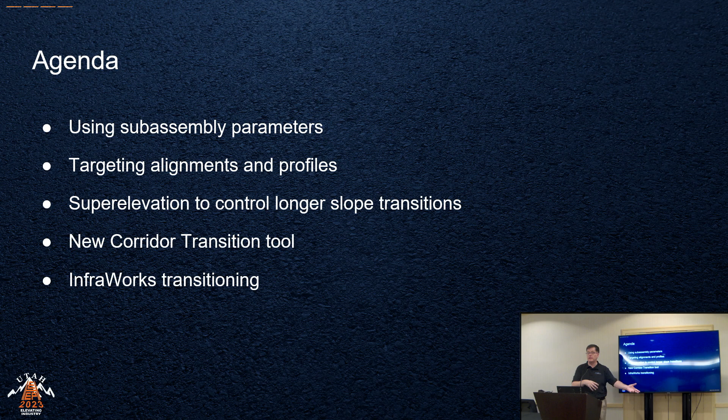So if you've got transitions that you know are coming, kind of the broad strokes of transitions, and you're using InfraWorks, do them there and then move that into Civil 3D for the final, more granular detail of your project.

So a lot of the concept that I'm going to talk about here today is the right triangle. And generally, up to a point, I'm going to be talking about having to compute two legs of this. Either I give you the width and the elevation, that'll give me the slope, or I give the slope and the distance, and that'll give me the elevation or the depth. You've basically got to provide two legs of this triangle, and there's some computations that are going to go along with that if that is indeed what you're needing.

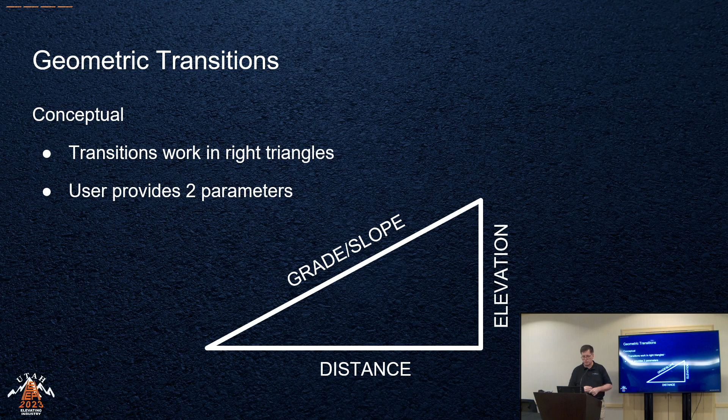Now, this is going to change when I talk about that new tool. But I'll talk about that when I get there. But this does get easier than what it is for the most part across the course of project work.

So let's first look at the subassembly parameters in the corridor. I've got a screenshot here of an orbited corridor. We spend a lot of time looking at corridors straight down, and you get frequency lines through there. The frequency lines are literally your assembly being applied over and over through the corridor. The assembly is also providing point codes so that you're getting what we call feature lines along the corridor, like crown point to crown point, and edge of traveled way to edge of traveled way.

These lines are absolutely straight. So there's no curve to them. You could probably compute something in there, but generally the corridors exist to be straight between known locations. Everything in between is just iterative or implied information. So again, great for understanding the construction of a corridor. However, for transition, this isn't always the best way to create a transition.

If I was to expand a lane, let's say going from a 12-foot wide lane to a 20-foot lane in an area, I could do that very quickly and make the transition area very close together so it's a very hard, sharp edge. If you need to make it a long, sloping transition over a long area, this is where this one kind of falls down, because it is going point to point directly. I will show that in a bit here as well.

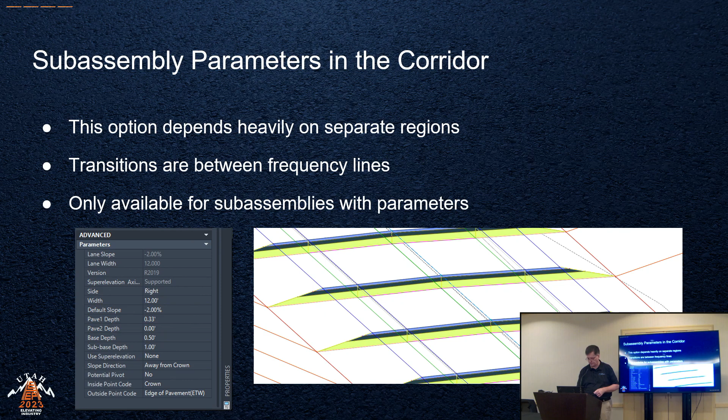Also, you only have available the subassemblies with the parameters that you have. Most assemblies are going to have what you need, but you do have to have that planned out for what you're looking for. So like I said, I'm only going to spend a little time on that. I will show some of that in demonstration. However, I want to talk more about the big tool, and that is alignment and profile targeting.

Alignment and profile targeting generally are going to control either the horizontal, that width of the right triangle, or the elevation, the vertical targets. Horizontal targets can be things like alignments, which are 100% horizontal location. There's no elevation component to them. If you want an elevation component to an alignment, that's a profile. So that's where that division line is.

You could also use feature lines or even polylines to target the width that you're needing for your corridor. For the vertical targets, you have profiles. Feature lines actually appear here as well because they are a three-dimensional line. So you could lay it out horizontally, but then go in and edit it so it has elevation. So it can control both aspects.

However, again, just like that right triangle, you are computing where that elevation is. So that is really on you or the designer to figure out where that location is. And by the way, keep in mind that elevations are affecting the slope. So if you are trying to define a slope out there, you're really working on the elevations of that right triangle to make sure it's in the same spot.

For me, that's a lot of computation, especially in transitions, because I need to hit certain points along a transition and make sure that my profile or whatever it is that I'm targeting is doing that work for me. This is great for longer and more accurate transitions because you can lay that out however you need it to go. Every nook and cranny can be modeled with alignments or profiles or what have you.

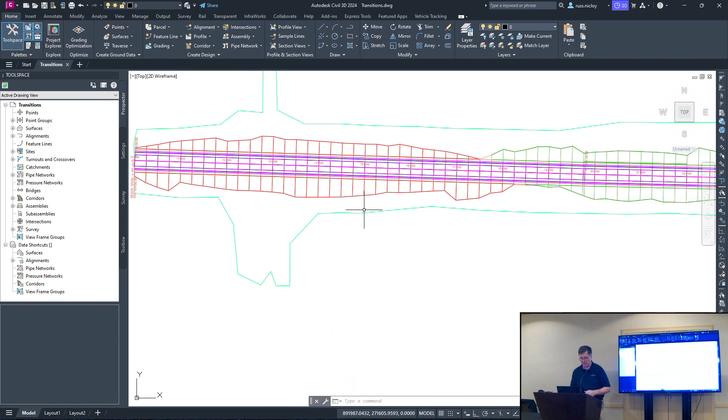Also, and I've talked about this, controlling the slope factors, knowing the profile elevation and width. So you're having to compute those two legs of the right triangle there. With that being said, let me jump into Civil 3D here. And first of all, let me orbit this again, just to make sure that we're all on the same page and understanding what the corridor is looking like in general.

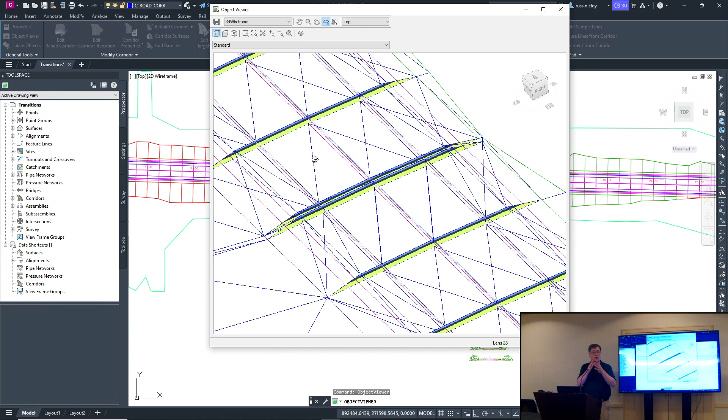Notice that the lines that are across the corridor here are the frequency lines, and they end up being basically a top-down view of your assembly being applied at the frequency that you are requesting. And you can make that frequency whatever you need it to be, very short together, or if long stretches of highway, maybe 100 feet, you can do whichever one is appropriate for you there.

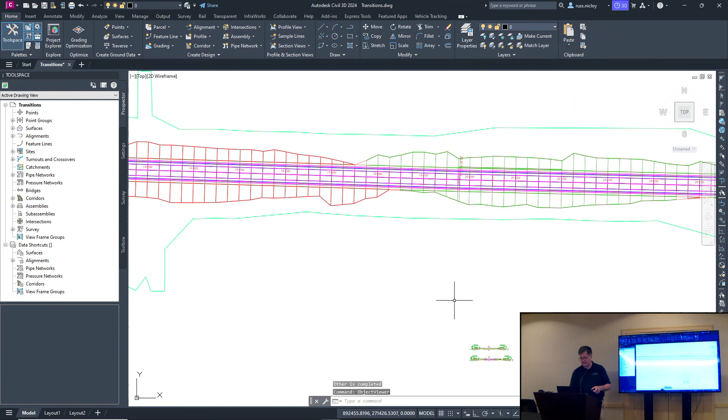But notice that I am getting lines that are going along here. These are the feature lines I talked about. The crown points are going to the crown points, the edge of traveled way through there as well. Now, I am going to show you the assembly that I have in that corridor is this top one. And currently on this right-hand side is a 12-foot wide lane. I've told the parameters, you're 12 foot. If it doesn't have targets, it will default to 12 foot. And I have no targets, so it's 12 foot along my entire corridor here.

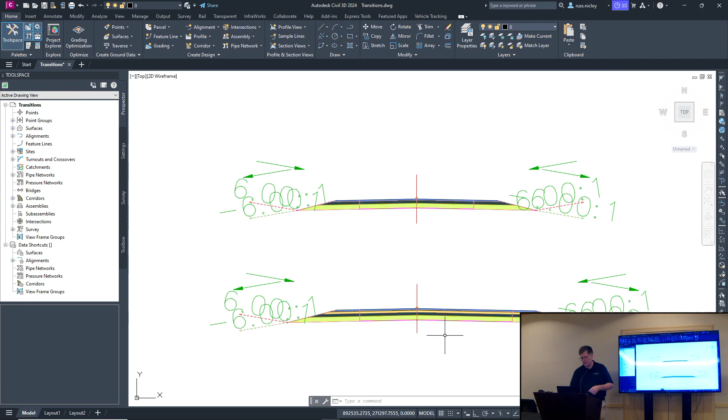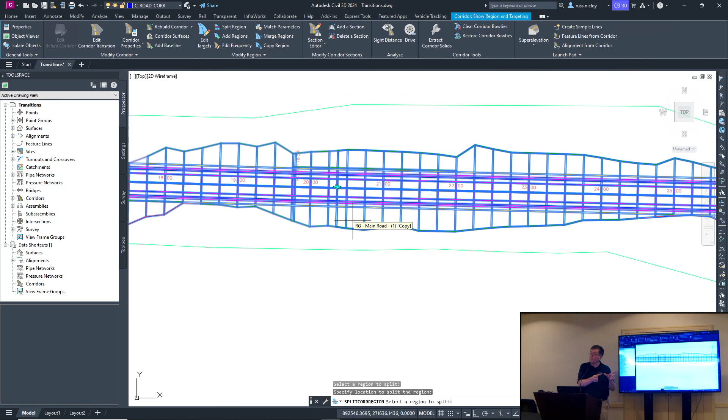Right below that is one that I'm going to add in, which is a 20-foot wide lane here. And let me drop that in so you can see what that looks like. I'm going to grab that corridor. I'm going to split this region. And now I'm going to click a point here that'll add a frequency in, and you can see some grip points because it's actually breaking that into two little areas that I can control separately from each other. I'll come over here and add another one there.

And now, I'll go into the corridor properties, and in that middle region, I've highlighted it here, you can see it's highlighting on my screen, I'm going to add in that second assembly that has the 20-foot lane to the right. And I'll rebuild that. And then in here, you can see the width of those rows. Now, if you're not used to seeing this, let me call out where the lane is. The lane is right here in the 12-foot and right here in the 20-foot.

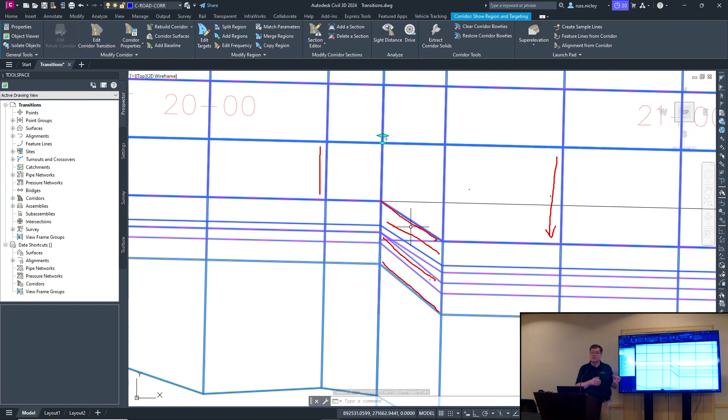Okay. But notice, more importantly, these lines here, where the edge of traveled way and the shoulder, because the shoulder has to transition along with the lane, it's all attached, those are going directly over there. Like I said, this is great if you need a very sharp transition. You just make that space right there, well, I've got maybe 10 feet, make that 0.01 feet, so it's almost a direct wall over there.

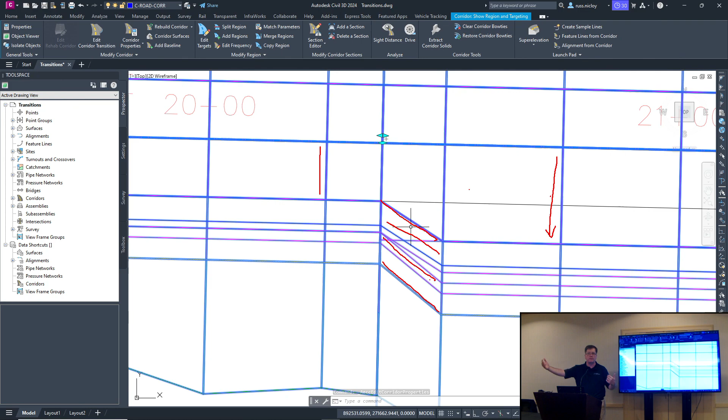Great for a hard cut. However, many of the transitions you're going to do are much smoother than that. They're going to be over 100 or 150, 200 feet. Those are not going to be as pretty when you do something like this, because you would have to get rid of a whole bunch of frequencies through here to accomplish that.

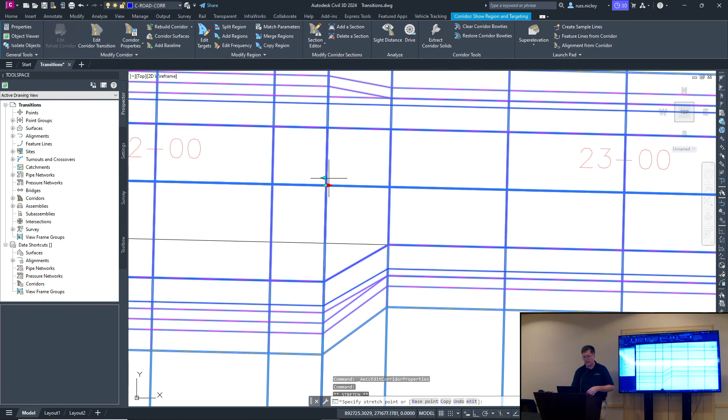In fact, I have seen this, and I don't recommend it. Before I do this, I'm not recommending this as a way to do it, but I want to show you the consequences of this action. I can grab these regions and separate them by quite a distance, but there you can see the problem. Okay. Now, this isn't as big of a problem as it may look at first. It's a huge problem, but it's not as big as it may look.

The feature lines cutting across there have stopped. They don't jump that gap. However, when we build a surface from this, the surface will jump across there. So it is a viable option. But again, I don't recommend it because you are trusting, and I'm not a trusting person when it comes to something like this. You're trusting that the surface is going to do everything that you intend across there.

By the way, it also prevents you from using a boundary around your corridor, or at least a boundary that you would probably want to use through there, or an automated one. So it's not the best option for this. But understand that people have done it, they've gotten away with it, especially in the early days of Civil 3D.

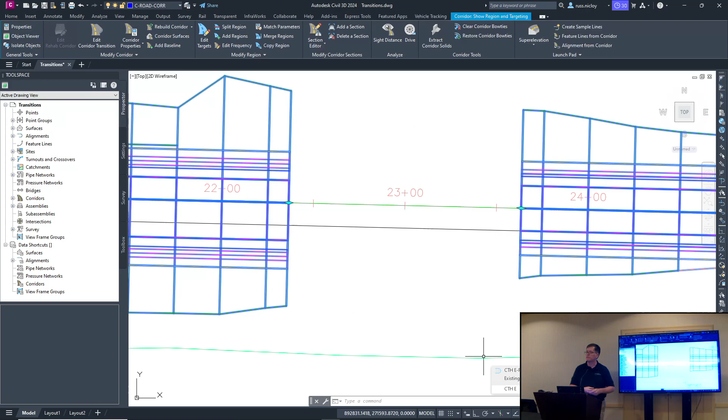However, there is a much better tool, and that is the targeting of the alignments and profiles. I'm actually going to go into my section editor here so you can watch this area as I progress through with it. And just so everyone is familiar with the view that I have, if you're not using Civil 3D or if you're new to it, I'm using the section editor so I can see at this station right here where I've aligned, that's what this cross section here is. That's a live view of the corridor as I'm using it here. So we'll be able to see some of the changes that I make live and in real time.

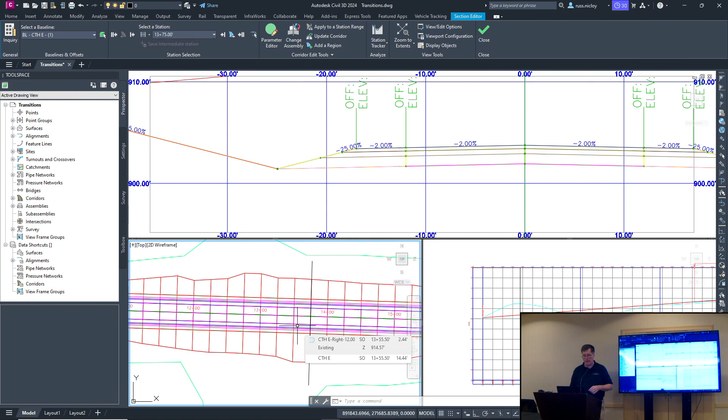But what I'm going to do in this area here is I'm going to make an offset alignment for my horizontal target. Now you can draw this in however you want. I'm going to use the automated tools to do this, okay? It's just one of the options at your disposal. You don't have to do this. You can draw in whatever crazy shape you're having to go through manually. I'm going to go in and say, well, I want this alignment right here, and I'm going to create an offset alignment. Offset alignments always stay parallel to their parent.

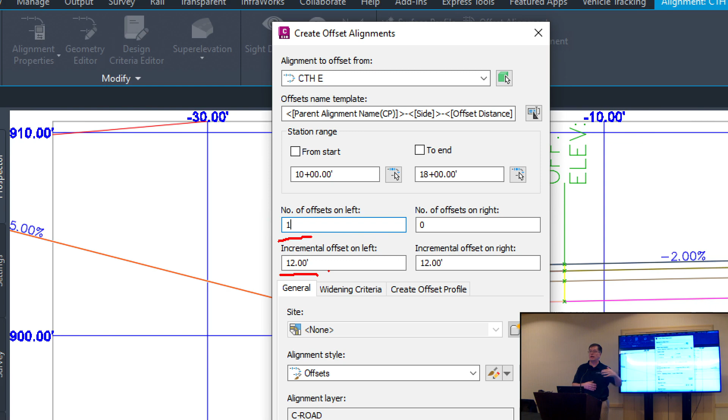I'm going to say I only want it for a little bit here. And I'm going to turn off the right-hand side. I'm only going to make one on the left-hand side. And the incremental offset here, let me zoom in on that so you can see clearly. I'm doing one to the left, and I'm going to do a 12-foot offset because my original lane is 12 feet. I want a nice tie-in here. Then I'm going to widen that out so that I can get to a nice turn lane or bus inlet or whatever it might be that you're designing there. So I'm going to go with the 12-foot.

I'm also going to turn on the Create Offset Profile because, again, you can create your own profile and make it however you need it to be. In my world, that's a lot of computation in a lot of cases, so I don't want to have to do the math if this is going to do this automatically for me. So I'm going to let the automated tools work for me, but just understand you don't have to.

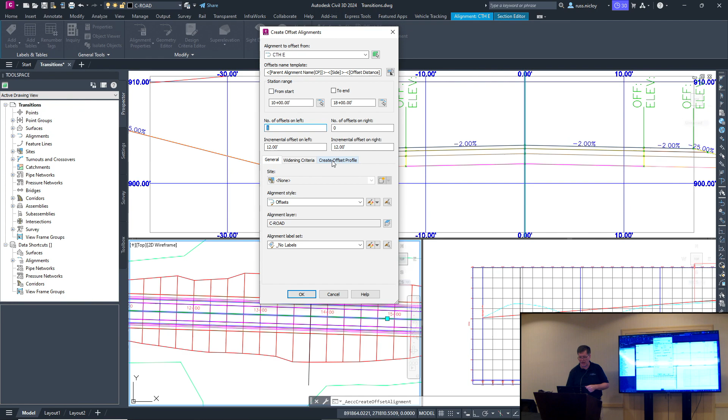The thing I really love about this is in the Create Offset Profile, you identify what you want that slope to be. So remember that right-hand triangle. I'm giving it the width and now the slope of what I want over that distance, and it's going to give us the elevation on that other leg. So with that, I'm going to say okay to that. That puts the alignment out there.

And I should have shown this beforehand, but the red profile here is the design profile. The green one is the offset profile. So over 12 foot, it has created a profile that is that 2% drop over the 12-foot distance.

Again, you could build that yourself, but you'd have to figure that all out. And I've met people that could do that off the top of their head. I'm just not one of those people. So I'd like to let this tool do it for me.

Now I'm going to zoom back on that just a little bit, because now what I'm going to do is widen this out. And you'll see that profile will adjust to the width that I'm giving it. I'm going to go to this alignment here, and I'm going to create a widening in it. I'm going to say from about here to about here. Not a very wide one, but I'm going to widen it to 25 feet.

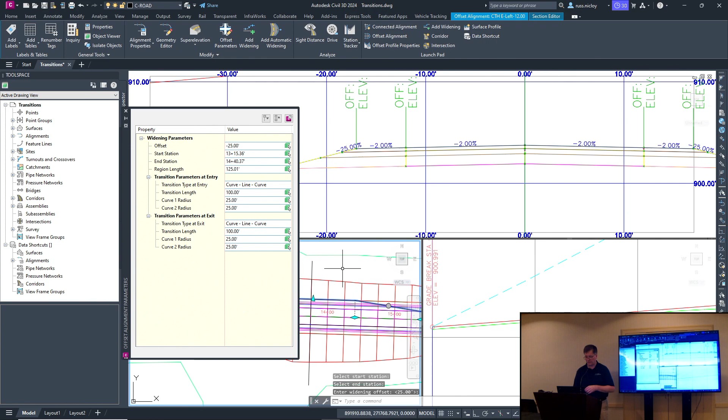And there you can see that alignment is built through there. It is building a transition in there which you can adjust. You can grab those grips. You can go into the dialog box and type in a very precise number of where you want the transition to start and end. So you've got quite a bit of control over it. But it is going out to 25 feet there.

Now with that, that's at about 1,300. Let me come over here and you can see at 12 feet at 2%, this is where the profile is, and then it starts to transition down to 25 feet at 2%. So it's doing all of that math for me and putting that profile in where I need it to be.

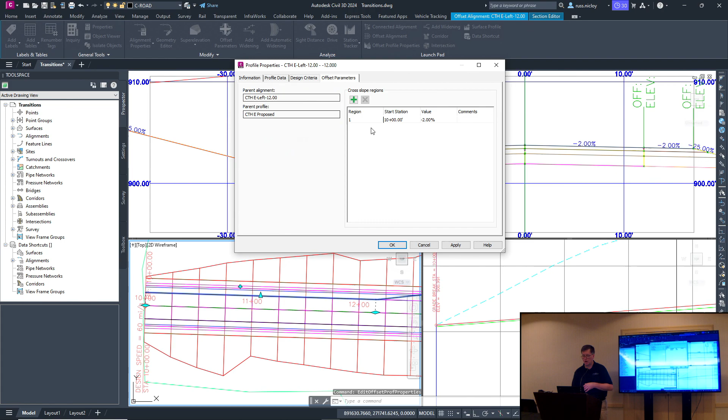Now, that's one part. I am going to build another one in here, and that is I'm going to go into that same offset alignment, but in this case, I'm going to go into the offset profile properties where we are controlling where that slope is. So if you decide, oh yeah, negative 2%, that's not what I wanted, I wanted negative 3, you can fix that here. It's editable.

However, what I'm going to do is I'm going to add in a couple here. I'm going to push a part of my roadway down so I can get into drainage or do whatever I need to hit. Maybe I need to hit a specific elevation somewhere. I'm going to click and add in a station. I'm going to add these very, very early on, 10+25. And at 10+25, it's -2.

So I want it to be -2 for a little bit here, and then I'm going to start transitioning into something else. I'll go to 11+00. And at 11+00, I want that to be a -5%. I'll say I want that to go to 11+75, and that's also going to be -5. And then at 12+75, so a nice 100-foot distance there, I'm going to send that back to -2.

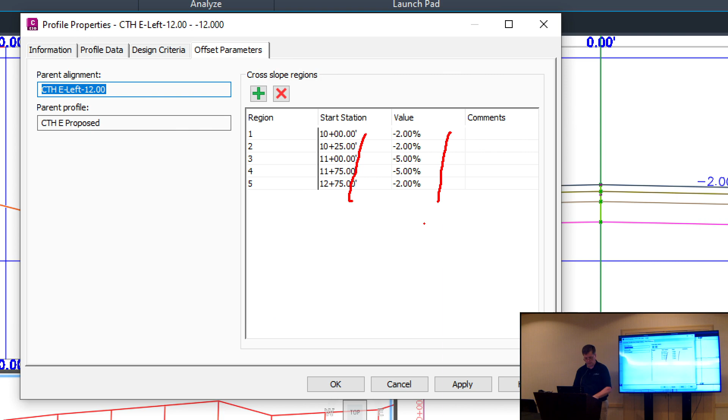Now, I chose those stations because they do overlap some things, but you can see again, just like we had earlier, you can see the stations and the slopes at each of those stations, and it's all editable. So if I made a mistake and it wasn't far enough or didn't give enough space, I could make those adjustments here again. I'll say okay to that.

And now, notice that the corridor really hasn't responded to it. And if you're not familiar with Civil 3D, the lane here is not targeting that alignment yet, so it's not widening yet. Also in our cross-section, we're not getting the slope change yet. And that's because I haven't told the corridor to do that. Let me jump into the corridor properties.

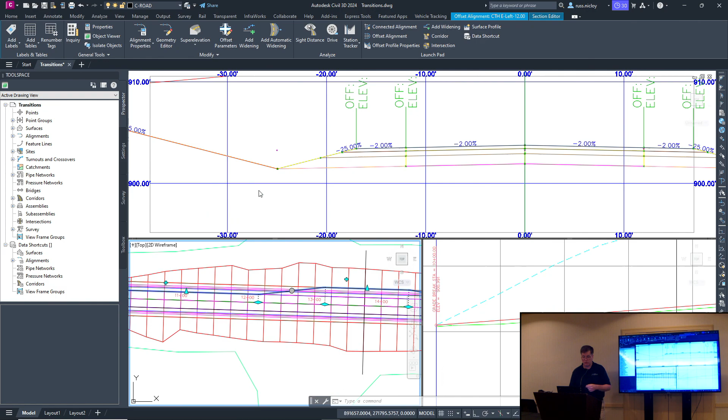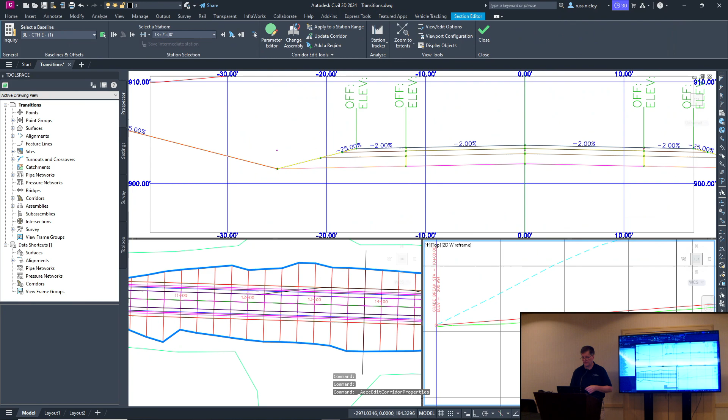And in here, I need to tell it that it's targeted to those things. So I'm going to go to the left-hand side. I have an outside elevation target that I'm going to target to my profile. And I have a width target that I'm going to target to that offset alignment. And once I have those set, I rebuild the corridor there.

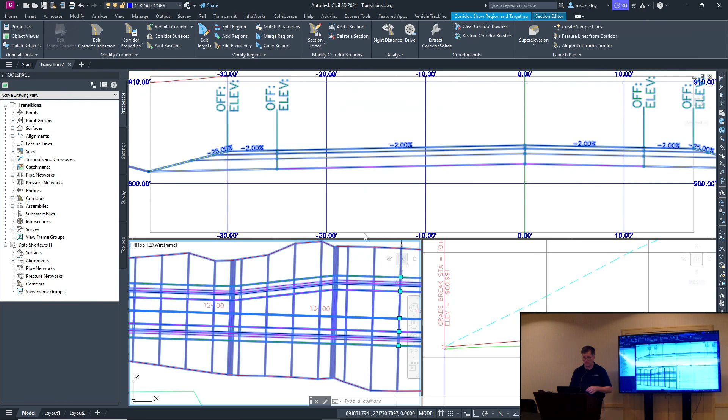And there you can see the lane is now reacting to that. It matches up nicely with that alignment that's in there. Also, if I start to adjust down my alignment there, let me get in so you can see the change. There you can see the slope of that lane is changing. Also, depending on where I am, right here I'm at 12 feet, but I can widen out to 25 feet in width, but that slope is changing across the course there.

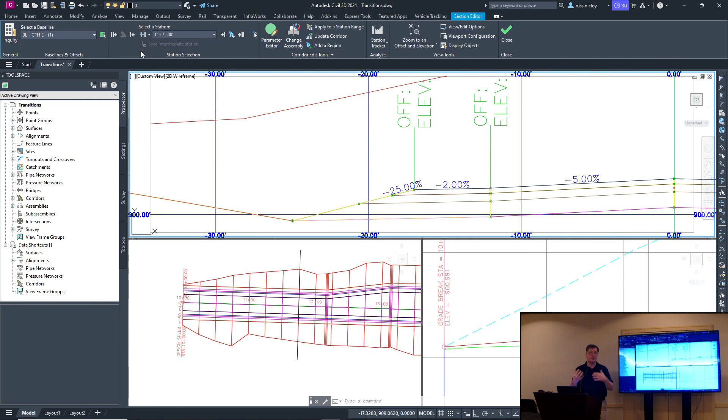So I've done a fairly complex bit of targeting in one area there, trying to get a couple different things going on with just alignments and profiles. Like I said, I believe about 90% of your work can be done with just those two tools alone, depending on how you station them and how you put them together. A little bit more computation on your end, perhaps, but the automated tools take care of quite a bit of that for you.

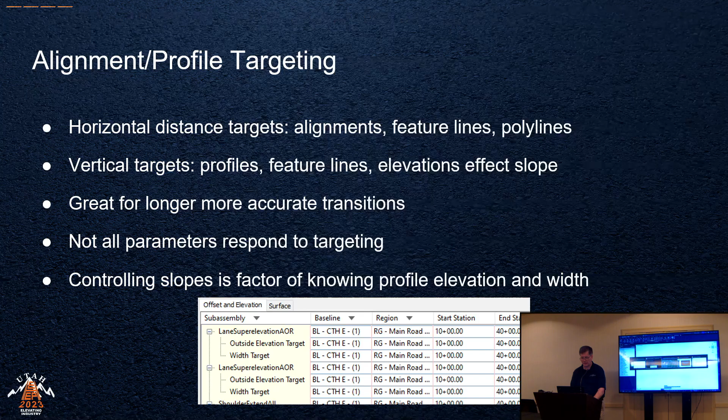So let me jump back in here so I can talk about that a little bit clever tool, the super elevation for transition control. And let me state again that this is not talking about super elevation directly. This is using the super elevation tool in a way that was not really planned on, or at least I don't believe was planned on.

I've seen it used here or there. Again, I don't know that I recommend it. There are some things about it that you need to be aware of. But I have seen it used in niche areas that I think you need to know about it at least. So for this, one of the key parts of this is that in the super elevation table, you have 8 columns of information. Now, they're all named for the critical stations of a super elevation, but that doesn't matter.

Those names are only there for targeting purposes and so that you understand where you're at and what you're getting. Also to communicate to others where you are and what you're doing. So those columns can be whatever you need them to be. Like I said, I did see this used for somebody who was building a golf course. And they used it to build bunkers and little hills throughout the course of the hill. Never thought I'd see that out of a corridor, but it worked and they used it.

So now, like I said, there's some huge issues here. First of all, what if you don't have any curves in your project? Now, this is actually not a problem. It had been a problem back in the day, but Autodesk has addressed that. There's a way that you can put in what's called a user-defined curve. So that problem's really off the list.

Now, something that's probably a little more of a problem is what if you have super elevation in your design already? At least some of those 8 columns are taken up. So you've got to kind of plan that out if you are going to use this. Like I said, these tools really are there for very specific kinds of work. And on transportation, they might not do everything that you want to do.

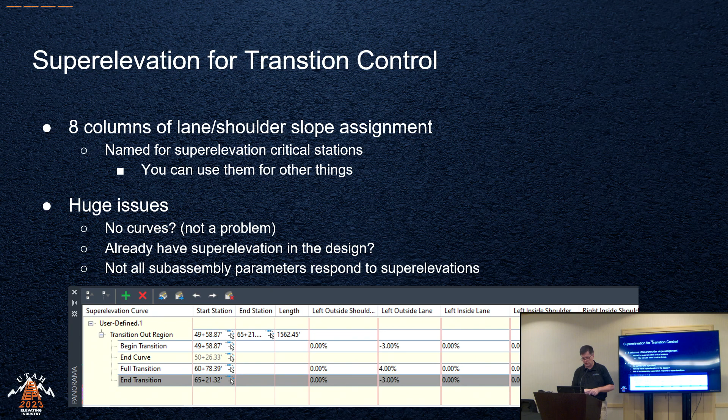So let me show you what that looks like, just so that you get a sense of what's available. This roadway does not have any super elevation. In fact, let me go into the tabular editor there and show you a complete blank super elevation table. There's nothing here. Now, I need to call that out because I'm about to put something in here and use that for my own purposes.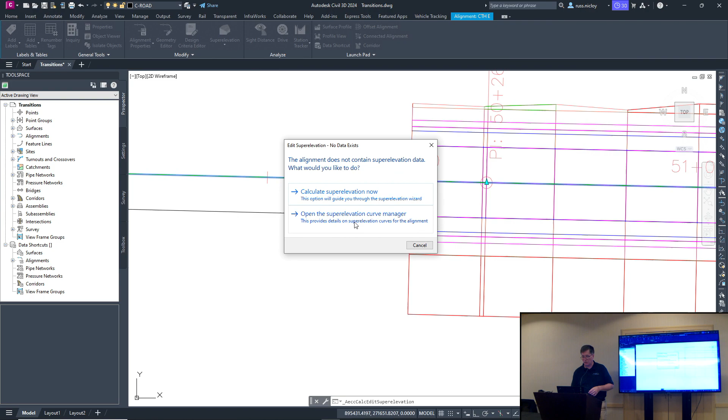What I'm going to do is go in and calculate the super elevation. There is a wizard, and I highly recommend that for super elevations anyway. It's a great tool to automate that process. You answer questions, it does the geometry for you. However, for what I'm doing, I'm, again, being a little more clever here. I'm going to go down to the Open Curve Manager, and in there is the Create User Defined Curve. That's Autodesk's kind of go-around when you don't have a curve. So I'm going to choose that tool right there, and I need to select the alignment.

And with that, now I'll go into that table again, and now you can see there is a user-defined column in there. It's basically a placeholder where you can add information into. I'm going to go up and hit the plus sign. You can add superelevation stations at any point. So if you're doing a legitimate superelevation, you could use that plus sign.

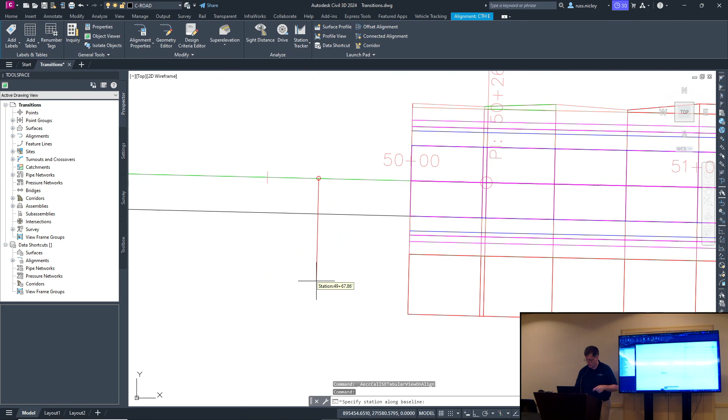And I moved just as I clicked it. There we are. Actually, I'm going to start right at the very beginning of my alignment there. And at that station, now I don't play pool, but if I did, I'd call my shots. I'm going to add this into the left-hand lane. I'm going to intentionally use the right inside lane column, just so no smoke, no mirrors, so that you can see, to prove a point that you don't need those names up at the top to be anything other than how you are assigning.

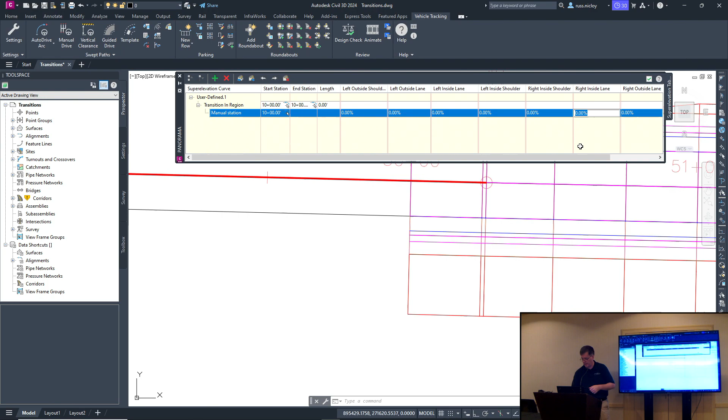So I'm going to go to the right inside lane. I'll say -2% there. Then I'm going to add in a plus sign, and then I want -2% to come up through the station about here. And at that station in the right inside lane, now notice it says -1.2. Where's it coming up with that?

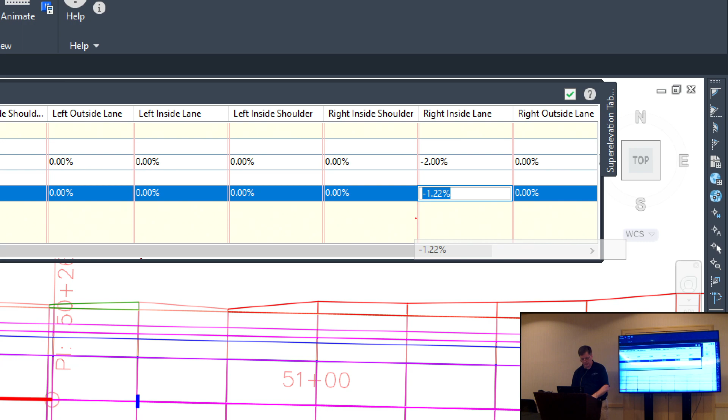Well, the whole thing here is that the superelevation table thinks of 0 as its start point, and when I gave it -2 at the beginning, all the way at the end of the alignment, it's still 0. So it's transitioning over a couple thousand feet down to that. So by the time I got to about 51+00, it's at -1.2%. So I just need to go in and make sure that that is correct at -2.

Last time it's normal. I'm going to add in another one here. I'm going to say that's 51+25. At that station, I want that to be -5%. And I'm going to just add one more in here at 53+00, and I'll say that's -2%. And again, I would add another station at the very, very end to be -2. That way I have a normal -2 all the way through the rest of my design.

Notice all of these columns are editable. If they're kind of this goldish color, then it's a locked field, but generally slopes and lengths and end stations are editable. Also, the names are editable here. So in this case, these are not critical stations. I'm going to add in, this is my alignment start.

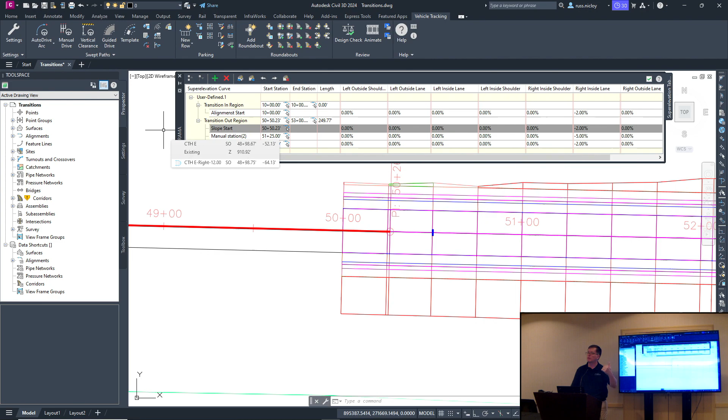I like to label these things, first of all, because my memory is terrible, but secondly, because somebody else might take this project over from me and they won't understand what's going on here. Hey, there's no superelevation on this, what's going on? They can read these out and say slope start. So those names don't have to be anything specific, but they can be that reminder for you to remember what is what throughout the course. I'm not going to fill it all in here, but that is now assigned to this alignment.

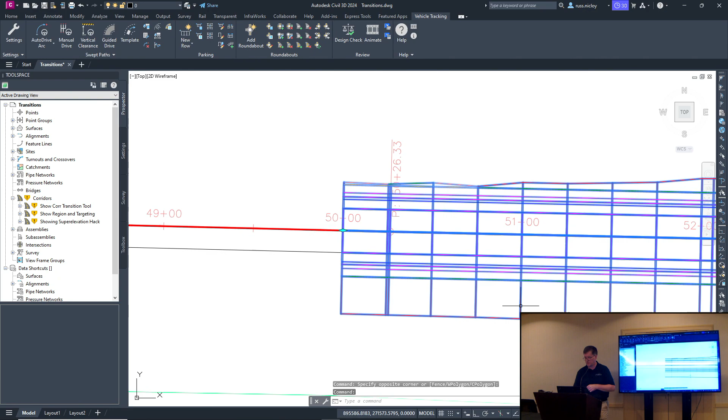Now, the corridors all, as I always call it, got angry. They're like, hey, something's changed. I don't know what. You need to rebuild me. I'm not going to rebuild it quite yet, though. I'm going to go into station 51+00 here and go to my section editor, again on the left-hand lane.

What I need to do here to make that slope appear on the left-hand lane is tell the assembly, or the subassembly part, what it's targeted to. The lane that I have here, when I placed it by default, had use superelevation set to none, which means it's literally 0 or -2 if I've given it that. It's not going to be responding to my superelevation table at all. Doesn't matter what I put in or where I put it in.

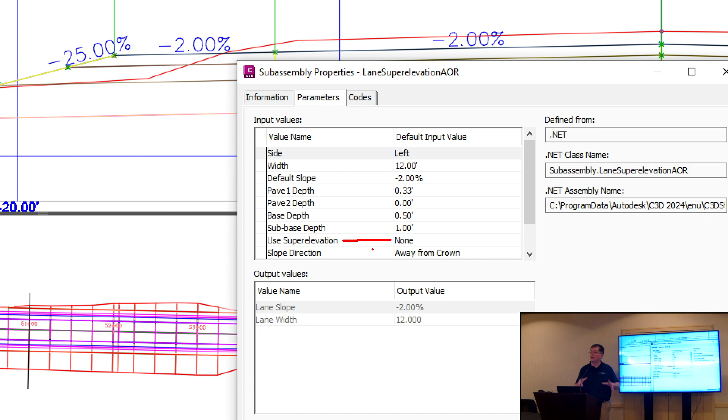I'm just going to go in and tell that particular station that it's the right lane inside. Remember, I called that one earlier. Right lane inside. I'll say okay. And now I'm going to rebuild all the corridors just so that they all are comfortable. And there you can see we're at 4% at this particular station. I can advance. I'm at full super, 5% there. And now I go back to 2%. So you can see it's now responding to that.

The right-hand lane isn't responding at all. I haven't turned that on at all. I could set it to the same right lane inside, or I could set it to something else if I've decided to use that at my disposal. Like I said, it's a little bit clever, something that you can get around issues with.

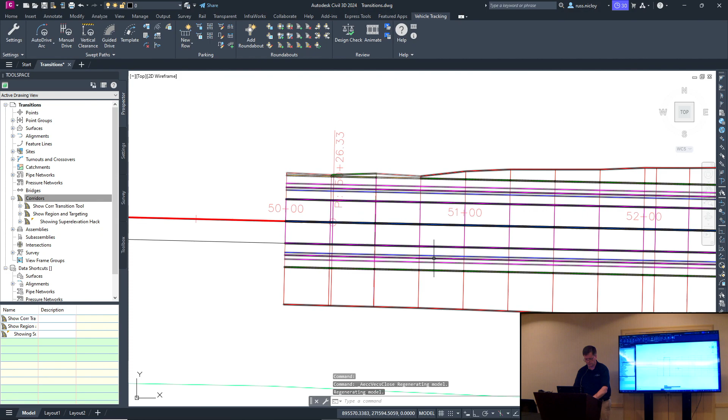So just something to know exists out there. Let me now talk about the corridor transition tools. And like I said, I think this is a game changer here. If alignments and profiles are doing 90%, this is doing at least the last 10%, maybe the last 9.5%, maybe even more, taking some functions away from the alignments and profiles. You just don't need to use them.

Because we've got this conceptual shift with this tool, that right-hand triangle that I showed you earlier, you no longer have to give two parts to it. This tool targets directly the parameter that you actually need to transition. In this case, I want grade and slope. I don't have to give it the distance and the elevation anymore. I can just go straight in and give it a slope.

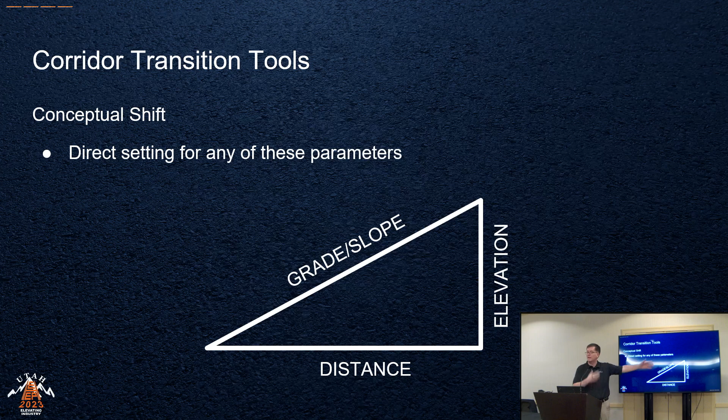You're going to see in a little bit here, I can also do depth of material with this, which is a transition that was always pretty difficult to handle. And this will take care of that. So again, the elevation, well, it's now a depth in that case, but it's still targeting that parameter directly.

So now this tool, by the way, if you have used Civil 3D in the past and you're not on 2024, a lot of times organizations won't adopt it immediately, so you may not have seen this. If you're in 2024, this is available to you right now. Out of the box, it's available to you. If you haven't seen it yet, though, just understand that this is something you need to look at in 2024.

What you do is you first of all just select the corridor that you're working on. You select it to make sure that you've got that. You go into the context ribbon and turn on the corridor transition tool, Edit Corridor Transition. Then in a top-down view of your corridor, you identify which subassembly you're working with.

Now, I think this is a little bit of an inventive way to identify a subassembly. A lot of times a list comes up and you have to pick which subassembly you're working on. I always pick the wrong side or the wrong one, so I like the graphic option. It really helps me, honestly. Then you will get to the parameters, and the parameters are this list right here.

Now, this parameter list is going to be specific to the subassemblies that you're using in that area. So you're never going to get too many things. You're never going to get something that's not going to work. You've got access to all the parameters that are available to you there with default slope, pavement 1 depth, pavement 2 depth, and so forth. All those in this particular option. Different subassemblies are going to have a different list, some shorter, some longer.

You will then identify the start station and the end station of your transitions and kind of bracket those in so it knows where it's acting. And then finally, you can provide a transition type. Linear is the default. It goes from point to point. Just like that first look that we looked at with subassembly parameters, it does something very similar, but it does a transition between them, so it's much smoother over longer distances.

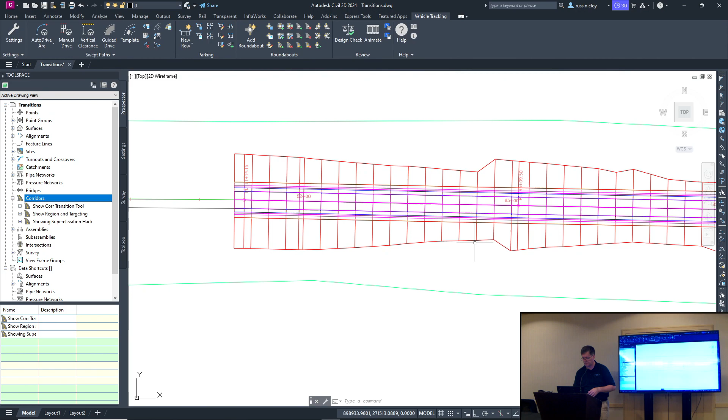So let me jump into Civil 3D here, and I'm going to select the corridor, come up to the Edit Corridor Transition. It's in the Modify Corridor panel if you haven't seen it. And then in here, notice as I move my cursor over the corridor, I'm identifying the different subassemblies.

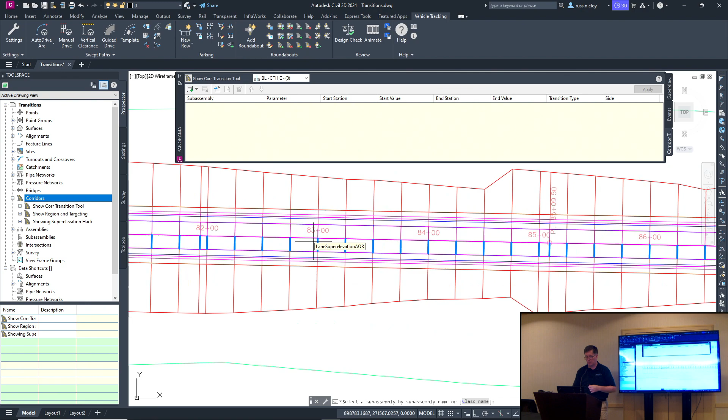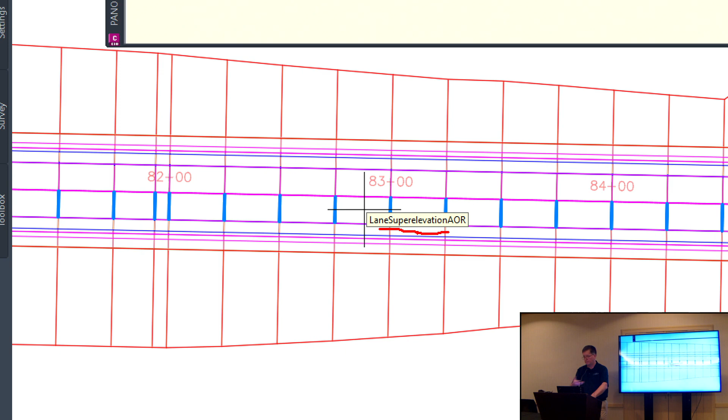Now, again, I will choose the wrong one if I'm not careful. If you're doing a curb and gutter, they can be small. You've got to zoom in a little bit maybe. But it will tell you; notice that my tooltip there is indicating what subassembly I'm actually picking up. Now, honestly, normally I name my subassemblies with lane superelevation AOR-L or -R, so I can tell it by the name. I didn't do that here, but I can still see that's the right-hand lane.

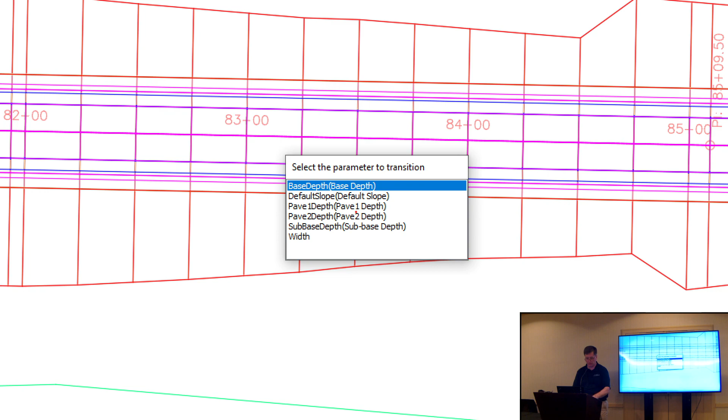So I'm going to identify that, and as you saw before, there are the parameters for that particular subassembly. I'm going to pick width here for the beginning part, and I'm going to pick a station to start. Let's say 8300. Now it's telling me up here at 8300, normally it's 12 feet. It's not putting that number in, but it's telling you, hey, normally that's 12 feet. What do you want it to be? I do want to start at 12 feet.

The end station here, that's 8300. I'm going to go to 8350. And at 8350, I'm going to go to 20 feet. Then I'm going to add in another one. I'm going to insert a transition below. And notice the start station picks up the end station from the first one, brings that over so you don't have to retype that. I'm going to come in here and type in 83.

I'm going to do 84. And the end value there is going to be 20 feet as well. So I have a little bit of 20 foot in there. But then I'm going to transition back down. I'll go to 8500 and transition back down to 12 feet. Now notice that lane hasn't changed at all. If you just look at that lane, it hasn't moved at all. I have to click apply to make that work.

But I'm going to make this a little more complicated. This is where the juggler starts to add different things into his act. I'm going to add some more things in here to make this a little more complicated and probably more realistic. I'm going to add in another section here, and I am going to pick the same lane. And again, you could pick as many subassemblies as you need and make these as different as you need to.

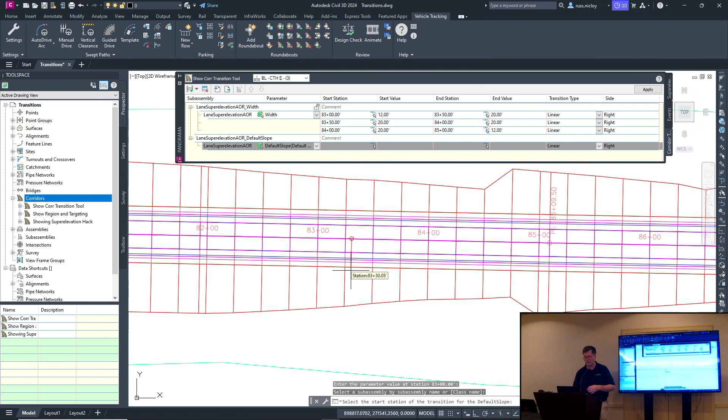I'm going to make this one the default slope, and I am going to overlap these as best I can. I'm going to start at 8200, and at 8200 the slope is -2%. I expected that, so I'm going to say -2 there, and I'm going to let that go up to 8300 and make that a -5%. I'll insert another one there again from -5. I'm going to go from 8375, so it overlaps that other one.

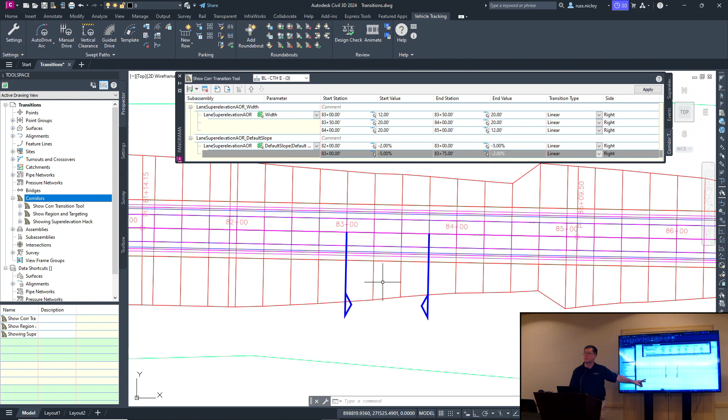And I should have pointed this out earlier. Notice the brackets on the screen. I love whenever the tools graphically confirm where you're at, what you're working on, because if you miss something, then you can immediately catch that graphically. When dealing with a lot of numbers, it's easy to get in the wrong space. And I'm going to add in 8475 to get back to my -2%.

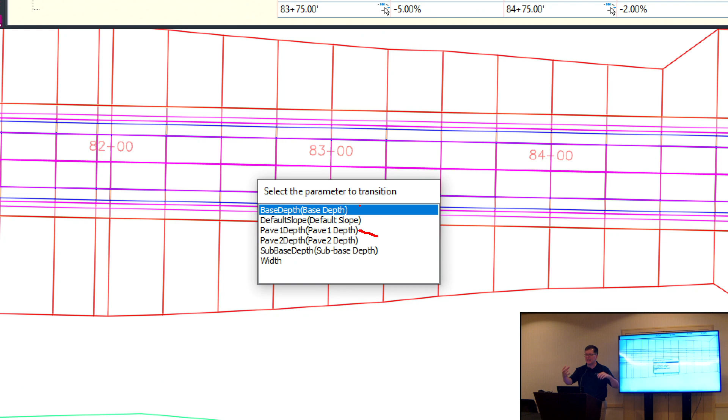And one more, because like I said, I want to make this kind of complicated. For this one, I'm going to do the pave depth. Now, I want to tell you how important this is to me, because on many projects, and I can't tell you how often this has come up, it doesn't happen all the time, but it happens just enough that it was always a little frustrating, like, to transition between that depth and that depth, you've got to do some crazy things. In this case, I can go directly to it.

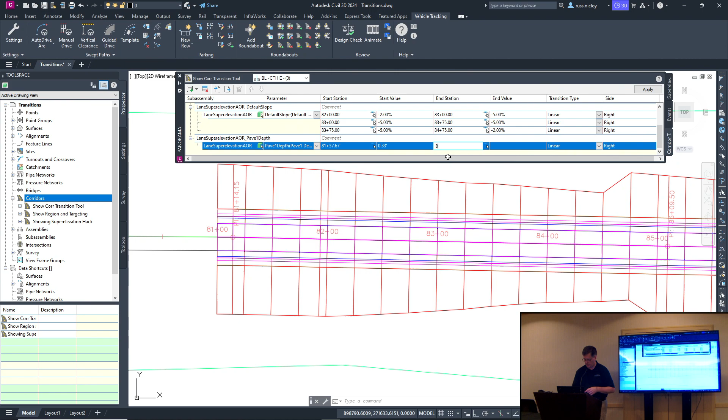So I'm going to pick pave 1 depth, and I'm going to start that one pretty early on. I'm going to start that back here. And the depth of that said 0.33, so about 4 inches in there. I'm going to say that I want that to be 8250, where I'm going to make that 1 foot. Now, I'm making that ridiculously large so that you can see the difference as it transitions. I mean, if you need to make it that deep, then you make it that deep.

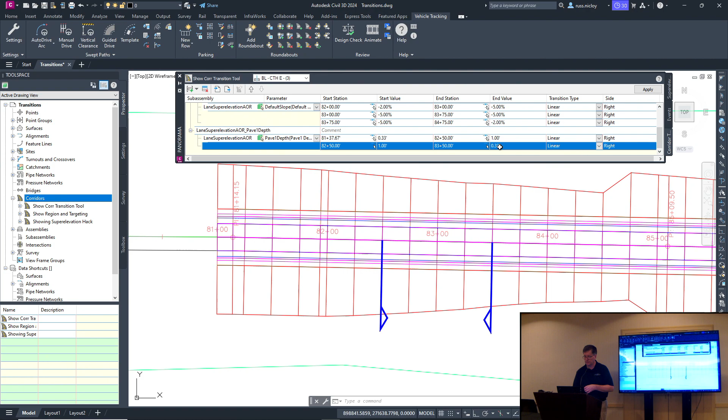I am going to transition that back at 8350. So again, it is overlapping the other ones to some amount, but I'm going to put that back to the 4 inches there. Now is where I'm going to pull the plug and make this work. I'm going to click apply, and all 3 of those are active. We can only see the width from the top down, but I'm going to jump into my section editor so we can see now we're on the right-hand side.

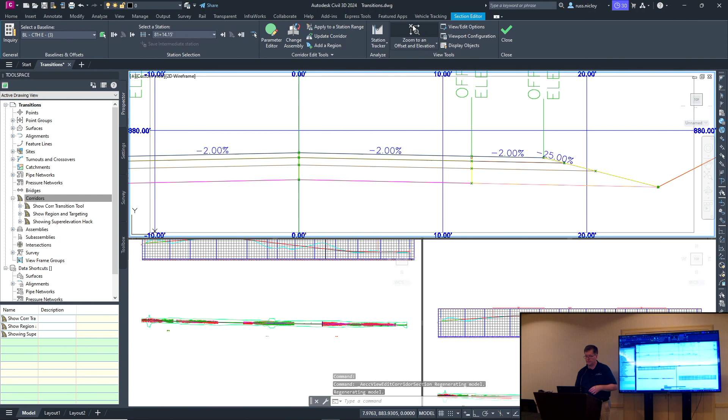And as we are advancing through this, we should see the depth of material start to change first over that long transition. And we're also seeing the slope transition here. And let me lock that in. And there you can see the width has changed as well. So I've got three simple transitions, but the way that they're overlapping makes them a very complex combination. It'd be very difficult to carry out with the tools at hand. So that's the kind of thing that you could do along the entire length of a design.

So I'm a big fan of this, and if I got a support call on a project, I would point towards this before a lot of other options. I think I would probably default to alignments and profiles because that's the old standby. But this tool here was going to get me out of trouble in most of the cases that I run into.

Now, I wasn't going to talk about this, but I'm going to talk about this real quick, and that is the parameter editor in your section editor. Some people do use that tool. I shy away from it just because it's easy to lose where the transitions are. It's a great tool in and of itself, don't get me wrong. However, it's very easy to lose track of where you're transitioning one thing over another. You're actually putting in very specific parameter numbers, and you are having to do all the calculations.

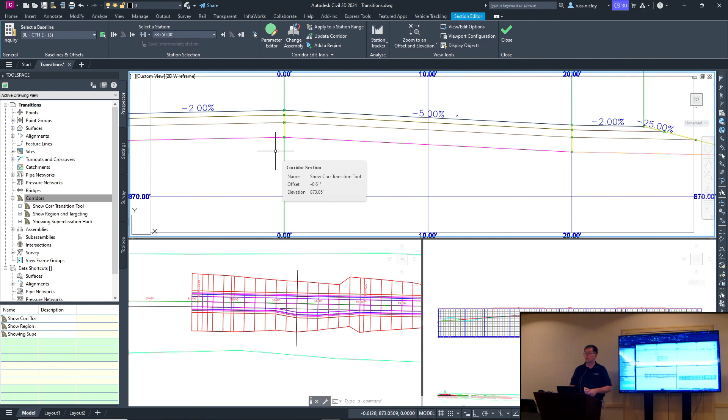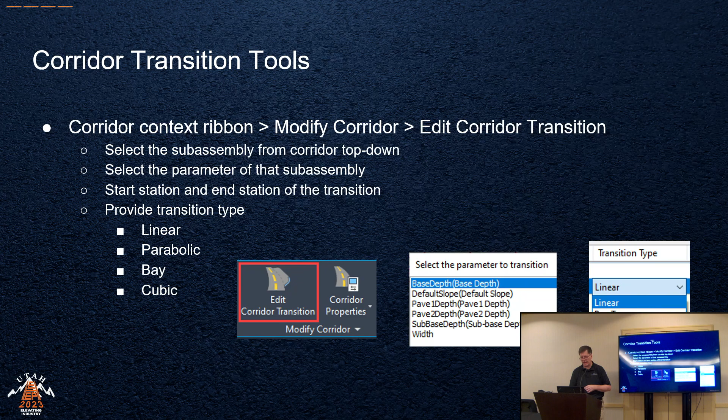It's very, very manual. So again, instead of pointing you towards that, I'm going to show you where parameter editor is, but I'm not going to open it. I would point you towards the new tool, the corridor transition tool, because I just think it is, like I said, it's the crown jewel at this point. So with that, let me take a look at transitioning in InfraWorks.

Like I said, InfraWorks works very differently than Civil 3D, although they ride parallel to each other because you can move data from InfraWorks into Civil 3D. I think InfraWorks is a great tool for a very early design of your highways. Move it over to Civil 3D for the granular editing and the things you need over there. Transitions in InfraWorks happen generally, and I don't want to overstate this, but generally by adding components.

You can see on my screen there, I'm adding a lane to it. And it automatically adds transitions in and out to the width that you're putting that lane in, so it's handling a lot of that automatically. You can see grip points that you can move them around. You can change the transitions to the very start or very end, so you can make them very long without having to pan, zoom, zoom, pan, zoom, and all of that.

One of the things I really love is that the intersections, whenever you have two roads that cross at any point, it automatically creates an intersection and then understands that, hey, you might need a turn lane in here. So if you edit it, it adds that transition in for you. So it's a very smart tool. It thinks ahead of what's generally going to be happening there.

Now, you can do different depths of materials. However, it's not a true transition. And this is where I'm going to lean on that moving data from InfraWorks into Civil 3D. You can get the more granular nature of that transition in Civil 3D once you move it over. But the broad strokes of a project can be handled by InfraWorks, and then you get in and do the more nuts and bolts after it's in there.

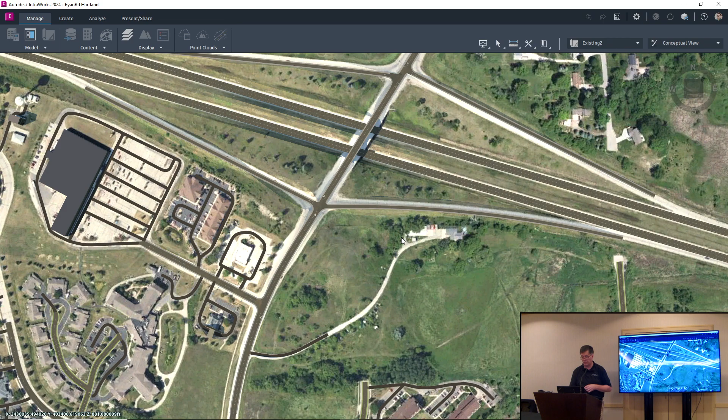So with that, let me switch over to InfraWorks here. I've got a project where there is a highway that they're going to add a third lane to. It's actually just a little outside of the Milwaukee area where I'm from, and they need to widen this up to increase traffic from this particular intersection. So I'm going to select that series of lanes right there, and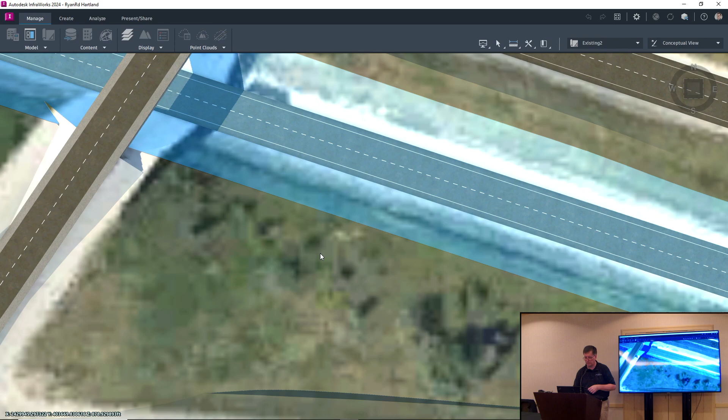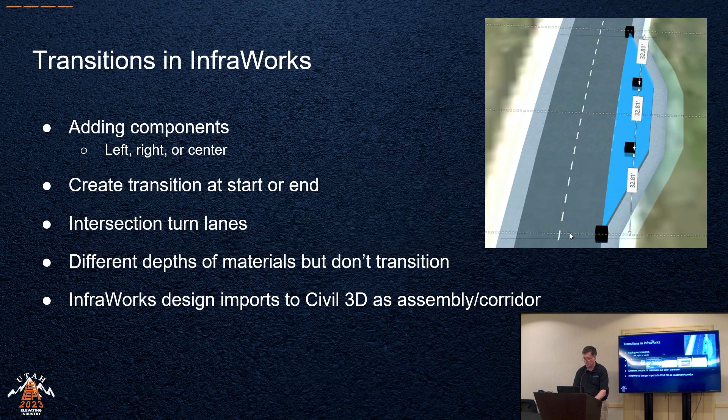now my right click is not going to work. Shoot, I've got lots of cool stuff to show on that too. Yeah, let me open. I did one in here that had videos of each of these just in case something like this happens. So let me just jump in and I will start that video of it there.

Actually, I started off with the intersection. So what I did was I selected the intersection and dragged the points back. You can see a turn lane being added, but it adds in the transition there automatically. And it even puts in the paint marks in that intersection, so graphically it looks good. Here's where I adjust the lane here. Now, I'm going in and inserting a component. I need to identify that I'm adding a lane component in here.

And now I need to be careful where I attach this because you can attach it anywhere. It doesn't know where it belongs, you do. I'm adding that to the south edge of this roadway here. I have to let it compute because it is doing transition work in there. But there, each of those grip points can be moved around. I can change the start and end.

I'm going to advance that all the way to one end. And it's like 7,600 feet of lane that I just did there. So again, you don't have to drag that all the way through. I can also change the transition there in and out. I can actually type in how far I want that transition to overlap. In this case, I went a little bit further than that. I was going to make it a 100-foot transition there, but I took it a little bit too far there.

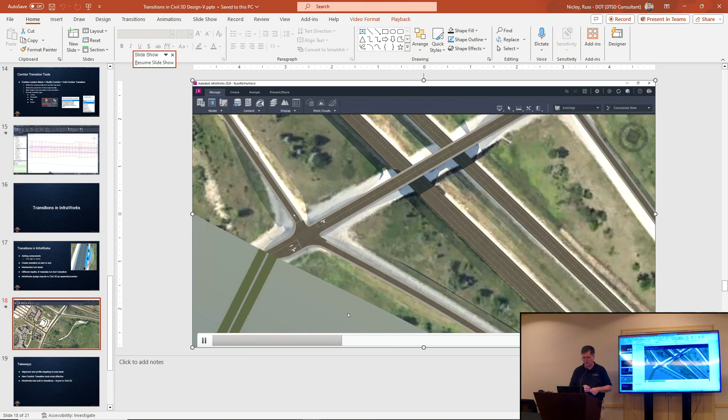Let me zoom in here on a portion of my road that I can add in. I'm going to add in a median, and in here, I'm going to insert a, there we are. I'm going to insert a component. And again, I inserted a lane earlier. This time I'm going to insert an asphaltic median. There is also grass median that you could use out of the box. I'm going to add that in.

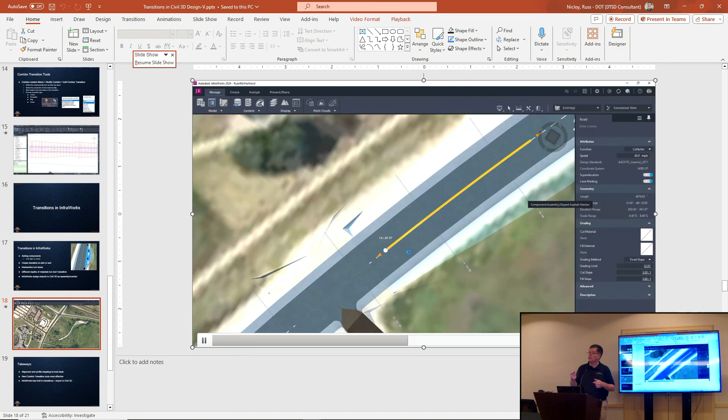And again, I have to pick where it's going to be. This is going to be in the center of the roadway. However, lanes don't, but medians have a left, right, and center functionality. So right now that's on the right-hand side. I'm going to go and change that to a left first. And then after that rebuilds itself to the left-hand side and transitions the lanes and the shoulders and so forth, I'm going to go in and change that to a center.

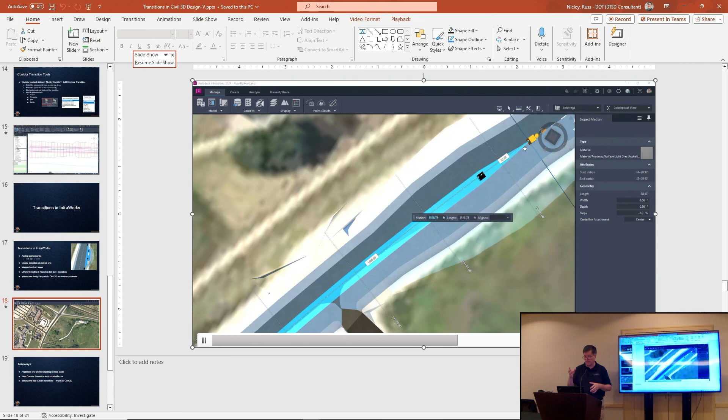And again, just like the lane, you can drag those grip points so you can lengthen or shorten those. I'm choosing to have that median go all the way from the beginning of the road all the way up to this point here, where it transitions back down to an undivided roadway.

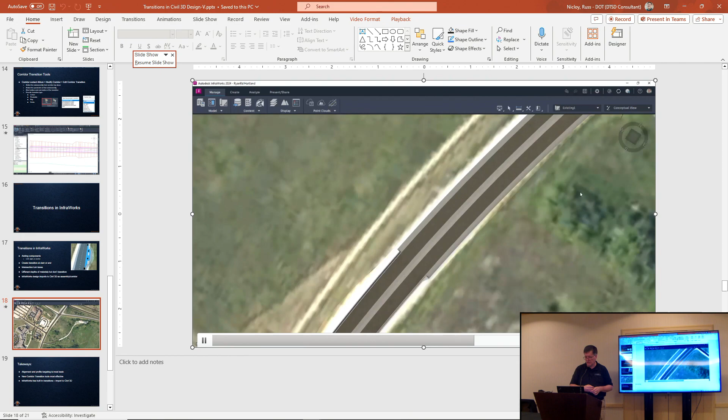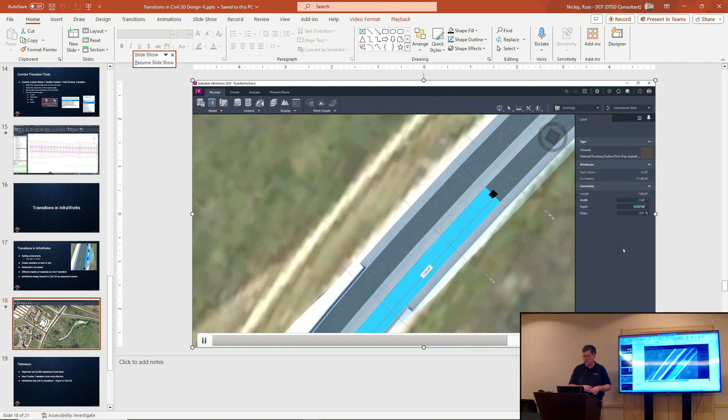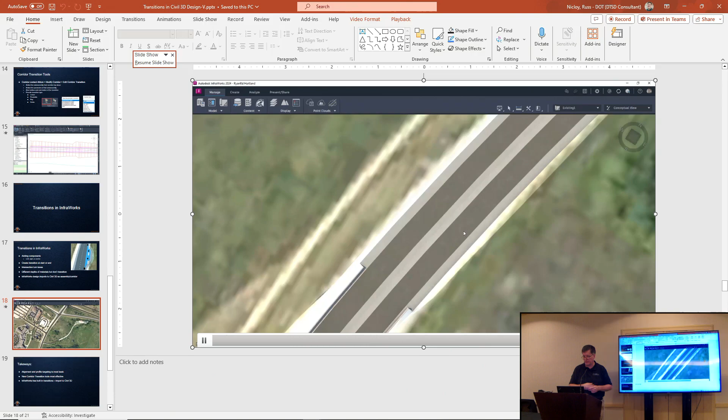Something else that I can do in here is I'm going to work on the depth. Now, I'm going to do this for the lane specifically here, but I can split that component, whatever, shoulder, lane, whatever it might be. I can go in and select a station to split it. And there on the portion that's highlighted, I'm going to go into the depth of material there and put in a very shallow depth. And again, this is not a transition. That's a hard cut right there. However, you can then move that over to Civil 3D and work a transition into the differences there.

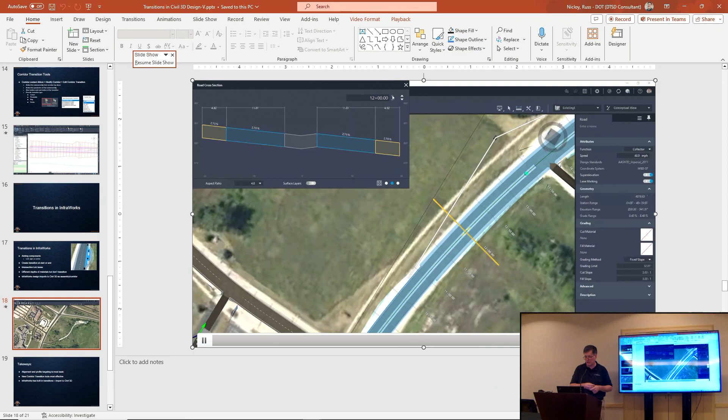Oh yeah, and I do go into the cross-section view so you can see that through this area here, there's my 4-inch on the right-hand side. If I advance a little bit, and I'll advance through this, you can see that's 4 inches up to a point, and then it becomes 6, or whatever the depth of that material is there. So you can see where that is working there.

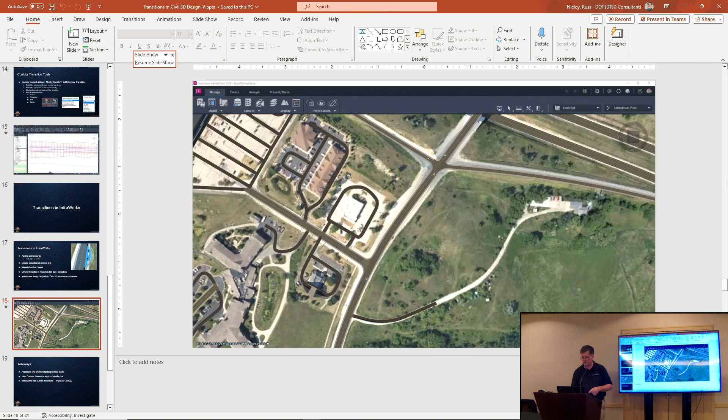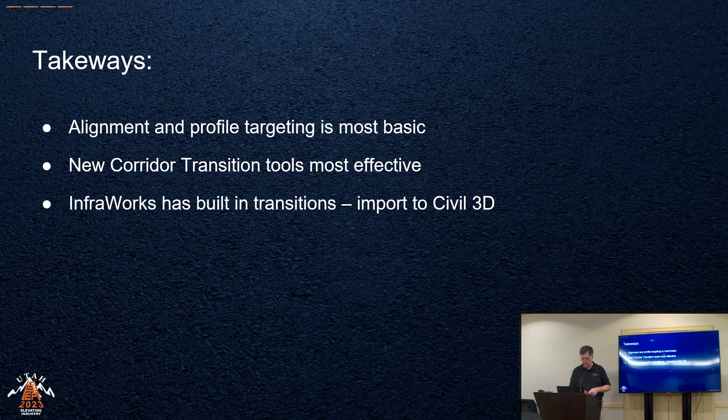So with that, let me give you some takeaways from the session today. First of all, alignment and profile targeting is the most basic, and it's kind of the go-to in a lot of cases. However, that new corridor transition tool is, I think, the most effective because you can do so much with it in so many different areas, in fact, along entire lengths of your corridor. And then also InfraWorks has built-in transitions for a lot of the areas that you're going to be working, but more importantly, it imports into Civil 3D for that nitty-gritty nuts and bolts work that you need to work with.